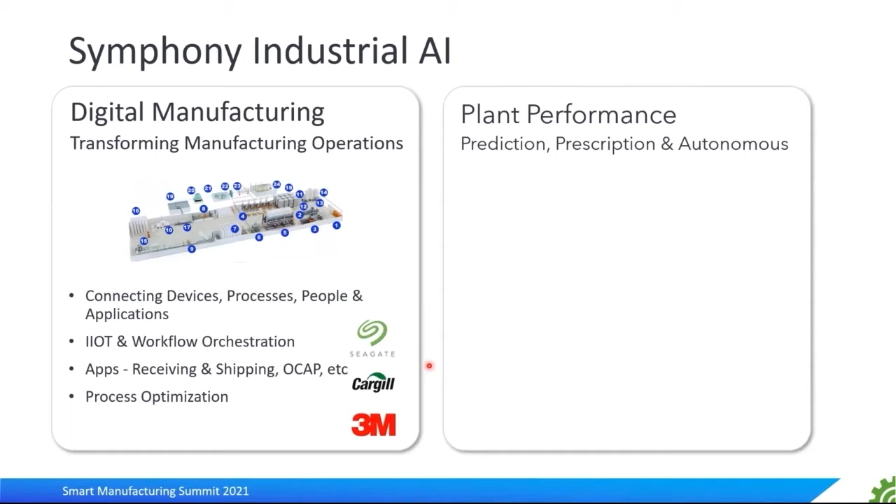Our divisions: digital manufacturing, this is connecting devices, processes, people, and applications, connecting from level 1 to level 4, and really in batch operations, taking variability out of process. Our customers are some of the largest companies in the world, doing a huge amount of automation, connecting sensors to workflows, to really driving to closed loop driving of the machinery that produces the product.

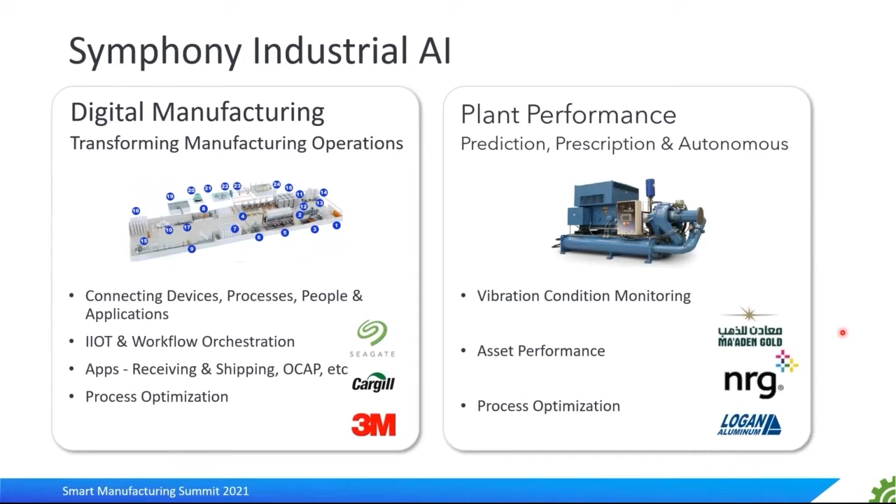In terms of our plant performance division, everything from vibration condition monitoring to AI based at an asset level, as well as at a process level. And some of our customers go anywhere from gold mining in Saudi Arabia to power generation in Texas.

You know, you can't rip and replace all of these systems. You've got to be able to gracefully and quickly connect them together from level 1 to the machines all the way to level 4 to the ERP systems. And that's exactly what we do in providing an elegant platform which provides a very low code and quick way to connect things together. And if you're, for instance, a specialty chemical company doing batch records, the ability to pull all the data that goes all the way from the machine to the ERP system to produce the batch record, that's what our customers do.

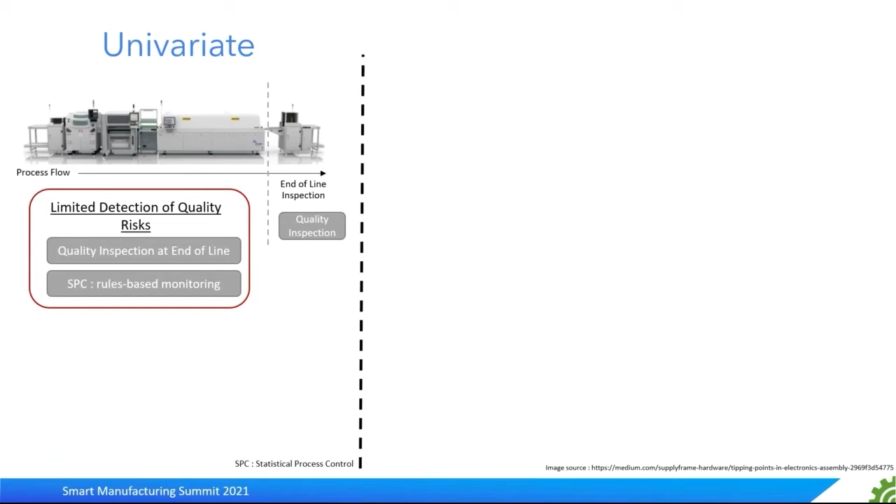The other very important thing for scaling AI is really moving from a univariate world where you're doing statistical process control, you're really looking at one parameter at a time and making sure these parameters stay within a statistical band, to a multivariate approach. Because with SPC, what you're not really getting is the interaction between the parameters, so you can find drifts and things that are actually happening that may be hidden because things are fine in a statistical band.

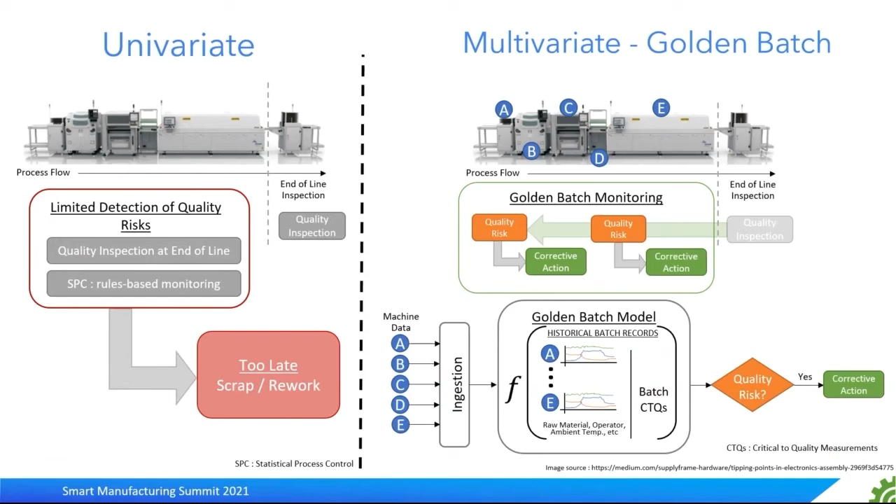And so going to a multivariate analysis allows you to take in many, many parameters and ingest these things, run them through the model, they look for interaction, and then why is this happening and what should I do about it in terms of corrective action, and to do it in a real-time manner.

So Gartner Group has said that AI has really been relegated in a factory to predictive maintenance, to asset performance management, and certainly that's the case. We have customers where we can spot catastrophic failure in a ball mill 19 days in advance. But we're also putting it into process optimizers where instead of just running the set points on a DeltaV controller and changing them from time to time, pulling data from the historian, we build optimizers on top of this environment. And in this case, this happened to be a gold mining company.

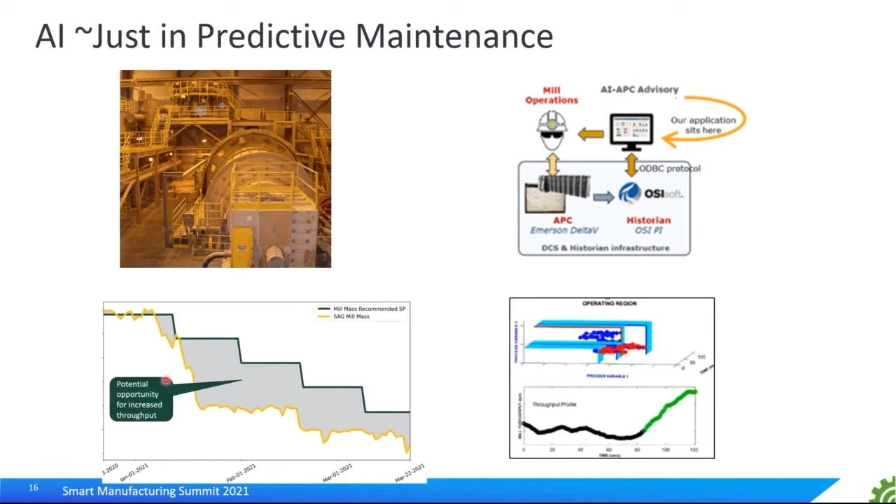Instead of changing their set points on a controller every 21 days, we were giving them optimizer suggestions every 30 minutes. And although they weren't changing the set points every 30 minutes, with a more frequent change in set points, this between the gold band here and the green, that's money. They were able to squeeze a lot more throughput out, about a 1.5% increase in productivity. On a gold mine, that's about $4 million a year.

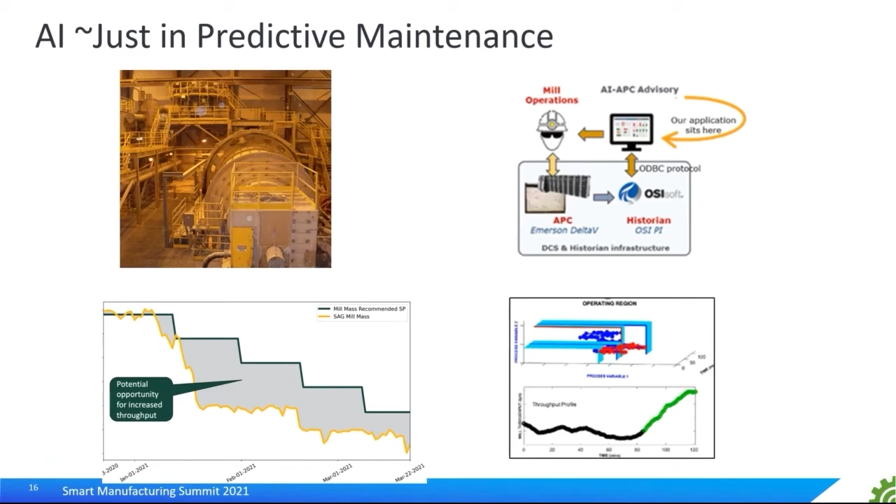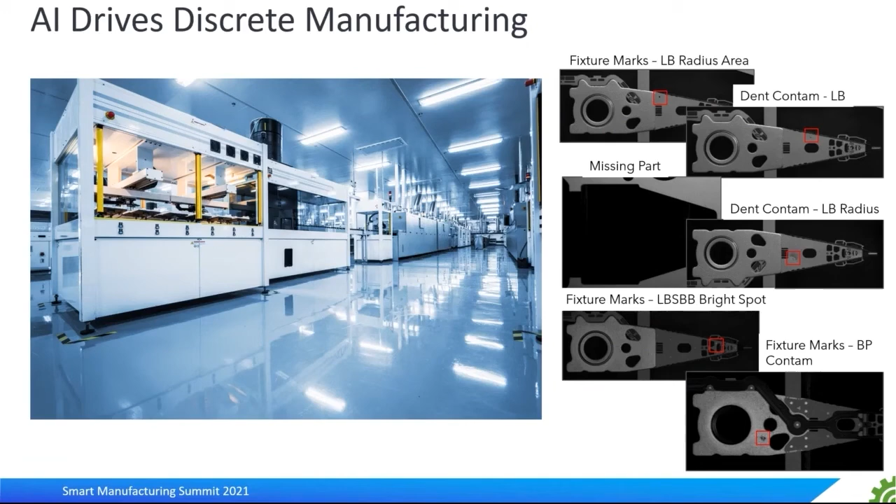So let's look at our world in terms of discrete manufacturing. This is a manufacturer of suspension systems for electronic components, and they had a large army of people doing final inspection and, in fact, rejecting more than they should have. So very high cost, and anytime defects happen, remediation is really after the fact. The challenge that they have is there's a really wide range of defects in terms of frequency and intensity, and how do you categorize them?

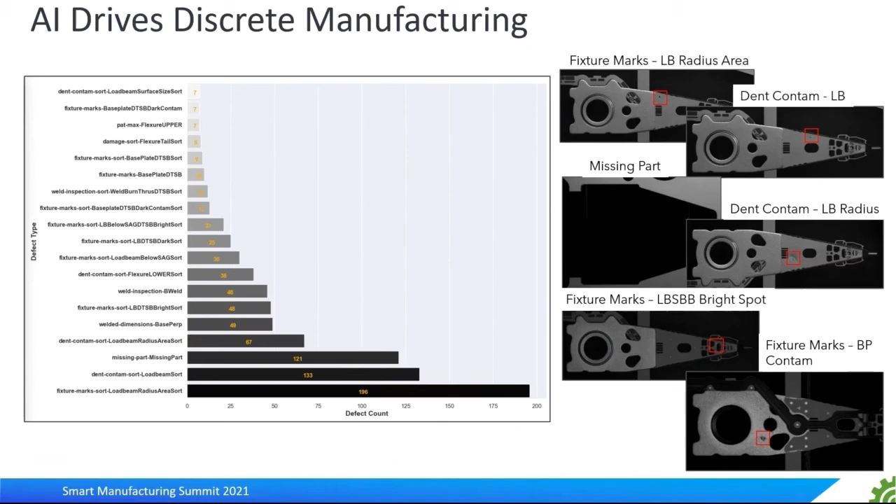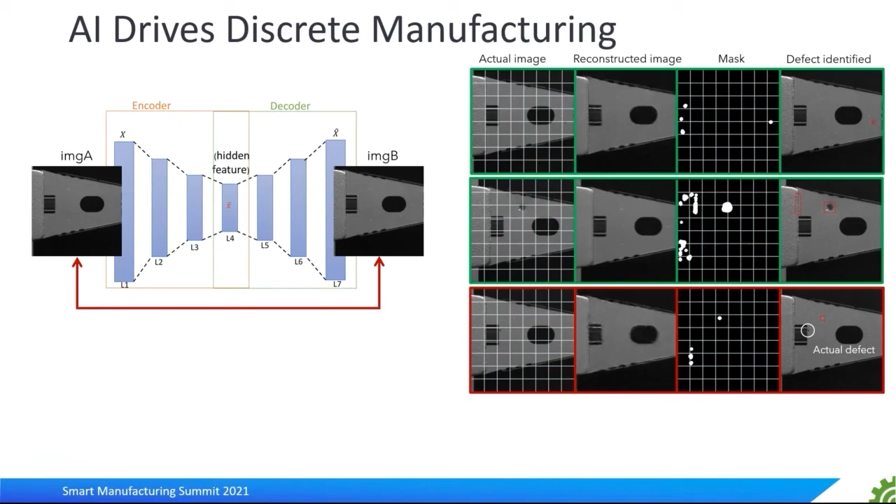We built autoencoders. You can see here the mask is really what the defects are, but this is when the work actually starts in terms of these defects. What's the cause of the defects, and what action should I take on the line, automated now? And so the process is a little bit detailed in terms of computer science code, in terms of all of the autoencoders and CNN-based networks and optimizers.

But basically what it allows for is, as the system is scanning and finding all of the defects, the optimizer is actually controlling the system. As an example, maybe slow down the RPM on the line. And then this image grooming is always an iterative process to, in fact, keep it within the parameters of the golden batch.

So in summary, AI has been long in coming in manufacturing. There's no question about it. I think from prediction in terms of asset health to real time in terms of controls on the assembly line floor is absolutely a now. And although AI is interesting, it's just an enabler, and putting, as Jim Davis would say, domain expertise into your AI model is critical. I'd like to thank you very much for your attention.